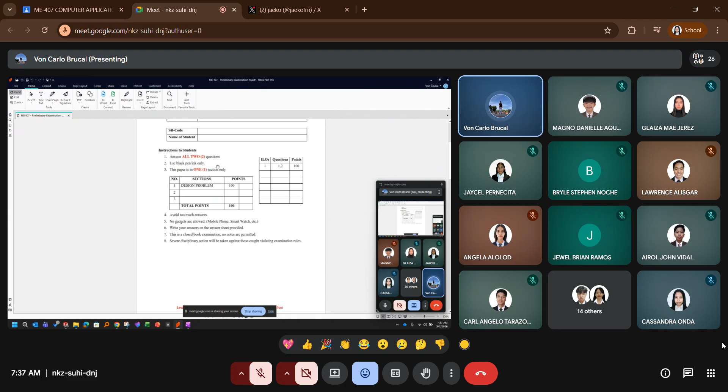There were two items that needed to be modeled, and the final answer will be the mass of the figure. But don't worry, the exam will be different from this, since right now I'm going to share with you how it was done.

Please access your SolidWorks so you could run through it with me. If you have questions, you can ask me already. If you have some recording tools, you may record this session also, so you will be able to understand how it was done in a very practical way.

So is your SolidWorks already open? For those doing SolidWorks now, can I see some thumbs up or reactions? Okay.

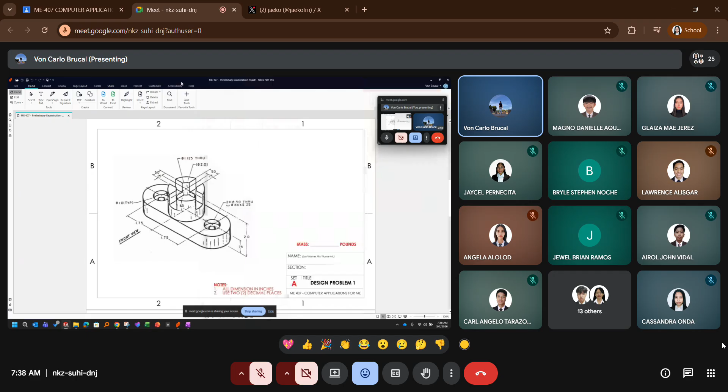So now I'm sharing with you the SolidWorks. This is the 2022 version. Again, I'm not very picky about which version of SolidWorks you use, as long as it's SolidWorks. Let me adjust this so it's not full screen, so we could have it side by side.

So the first thing you need to do on SolidWorks is create a new file. Click new, then it will be on the part environment, which is this one. Then click OK. So this is what you got after you create a new file.

The first thing that you are going to do whenever you see a design plate or design exam is to read the notes. The first note here is that all dimensions are in inches.

So where are you going to adjust this in SolidWorks? You will see it at the lower right bottom. You will just click this one and have it set to IPS. We have four selections: meter-kilogram-second, centimeter-gram-second, millimeter-gram-second, and lastly IPS, which is inch-pound-second.

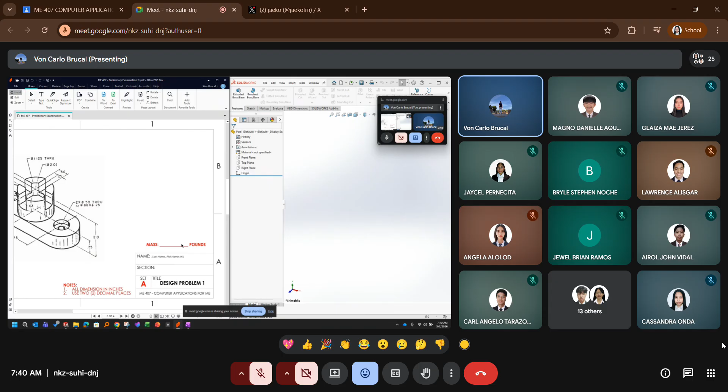Going back to the test paper, you'll see that all dimensions are in inches, using two decimal places, and the mass is in pounds. So you need to make sure your answer is in pounds.

The second thing you're going to do is inspect the model. When we say inspect the model, make sure you are able to visualize it yourself. It says here that this is the front view. So this projection will be the front view, this area is the top view, and this is the right side view.

If I were the one taking this exam, the first thing I'm going to do is plot these dimensions, or analyze what the figures here are. We have a slot, so the lower base is the slot. We have two holes with counterbore, one circular boss, and some slits or cutouts.

Let's do it one by one. I'm going to start on the top view, imagining that my eye is here and I'm looking downward. So, top plane - then you'll see this sketch icon, or select sketch, select the top plane, then click sketch.

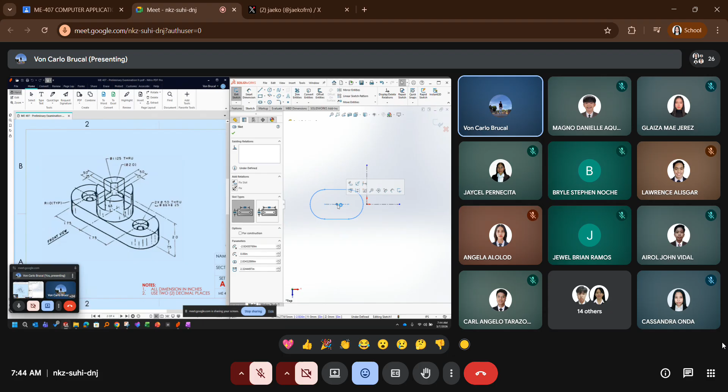Then the next is this one. You need to fix this center line of the slot to your origin, which is this one. So select this point of the slot, while holding the control button, select the origin and have it as coincident. So now you have a slot and it is on the center.

So now what you're just going to define is the size of the slot, how wide it is and how thick it is. So now let's go with dimensioning. So what we have here is that it has a radius of 1.0, or I would say here, since it was in inches and two decimal places, we can have it as 1.0.

Smart dimension, select this one and have the radius as 1. So it's 1 inches, right? And since you are creating a slot, meaning this radius, it should be equal to this one.

Now you will be able to see that the center of this one, this 1.75, is the same as the location or the center of this radius. So click smart dimension. Okay, let me highlight this one.

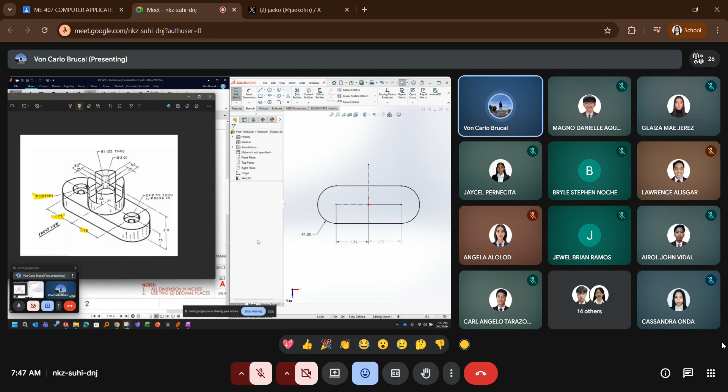All right. So let's mark this 1.75 and this one. And now let's have this thickness. So this thickness is 0.75. So exit sketch. After exiting sketch, click extrude boss or base. Then define it as 0.75. So you're also okay with this 0.75.

Then you should be able to create this hole callout. So it was defined as there's a through hole of 0.5 inches and we have a counter bore of 0.88 inches with the depth of 0.25. I'm not sure whether you are familiar with this kind of dimensioning, but this is a very typical mechanical callout for hole with the counter bore.

So first, let's start with this 0.5. In order for you to do that, select this face, right click and select normal to. After that, select this face, then click sketch. After that, again, the first requirement that I'm asking you to do is create a center line from here to here. Then after that one, create a hole. Create a hole first. After you create a hole, establish the size and the relationship.

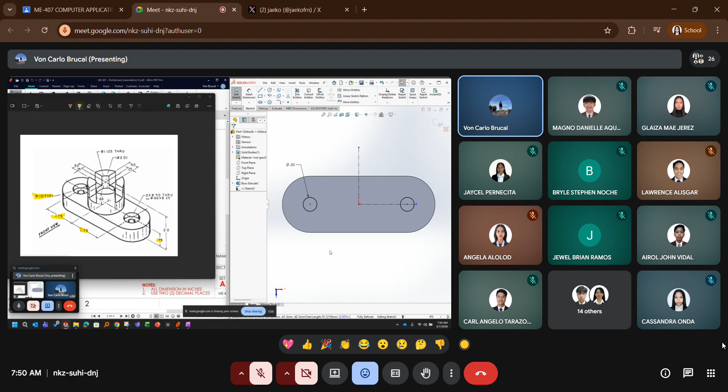Then after that, in order for you to translate here on this other side, click mirror entities, select the circle itself, then mirror about your center line, then click OK. So, and you are going to create your feature through. So exit your sketch, click feature, click extruded cut, then since it's through, just have it here, select through all, then click OK.

So you now have two holes. So let's highlight this one. Okay, let's now do the 0.88 counter bore with a depth of 0.25. So select this portion, click normal to, select this face and click sketch.

Again, the first thing that you need to do is create a center line. So after you create the center line, now create a hole again. This time it's a counter bore, meaning the center of these two holes we created earlier is the same as this counter bore. So just click here.

Have it here and define the size, 0.88. It's already color black, so it's defined already. It shares the same center with this hole. Then click mirror entities, select entities to mirror, which is this one, and mirror about is this one. Then click check or OK.

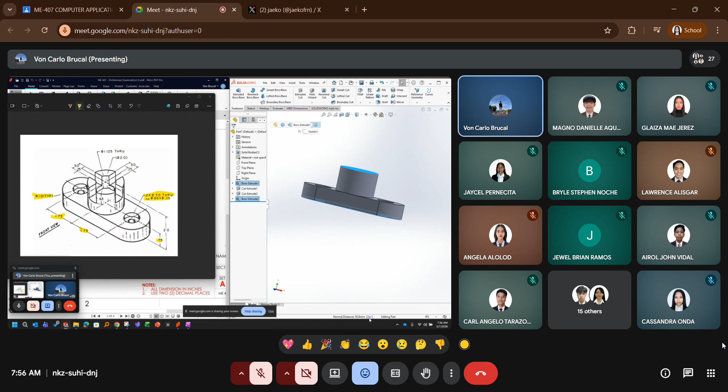Why am I selecting this one? Because you should be able to set the bottom part as this and have the dimension 2 inches. So it is now projecting at the bottom. In order for you to project it on the top, just select this one and click check. To validate that, select this surface, and while holding the control button, select this surface, and you will be able to see 2 inches here. It's 2 inches at the bottom. Okay, so we are now okay with this dimension.

The next is, there is a hole which is 1.125. Let's make another hole. Select this face. Why this face? Because this is the source of the hole going down. Select this face, right click, select normal to. Then after that, select this one, then sketch. Create your center lines.

Then select circle here and let's have a dimension of 1.125. Then it is already color black, so it is already defined, fully defined. Exit the sketch. Then click feature, extrude cut, and it should be through all. Now we are okay on this dimension.

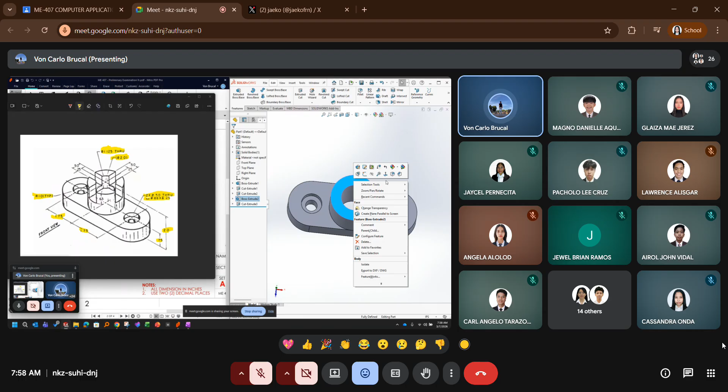Okay, now let's create this slot here, which is 0.5 inches. So right click, select this one, then right click, select normal to, then select this one, create, click sketch, then have it as center line like this. Then you are going to cut this kind of portion. So let's have a rectangle here, let's just create first a rectangle.

Then since it is related on the center, select this one while holding the control button, select your reference line, select this other line, so you have 3 lines, then have symmetry. Then same with this one, select this line, your center line, and this line, and have it as symmetric. Then define the dimension, the dimension is 0.5. So smart dimension from here to here, it's 0.5.

Now you don't know the length, right? You don't know the length of this rectangle that we created. So, and your intention is just really to cut. So just select this line and select this projection line here and have it as collinear. So now you have this line. At the same time, we're going to create this portion, which is also 0.5.

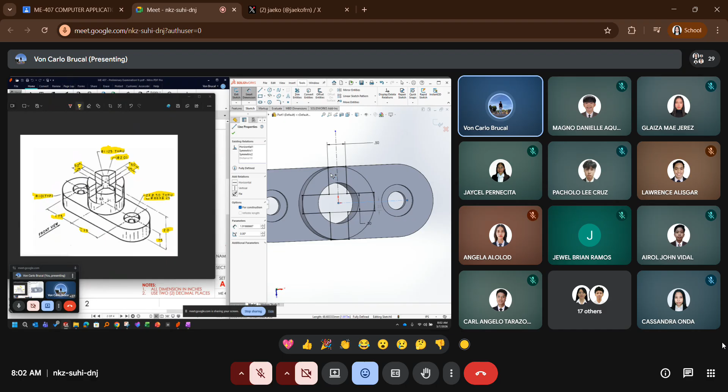Now we will be able to define this portion and this one. The 0.25 was defined as symmetric, meaning from this portion up to here it is 0.25 — it's a driven dimension. So that's the 0.25 here. Then exit sketch, and now extrude cut again, extrude cut, have it blind at 0.63.

Now you're also done with this. So that's it — you now have this one up to here.

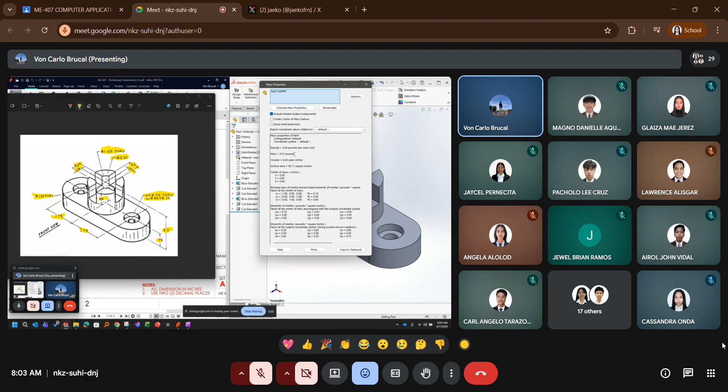In order to validate your answer, click evaluate, then have it as mass properties. You should be able to get 0.31 pounds. That's the answer you should write whenever you are answering this — it should be 0.31 pounds.

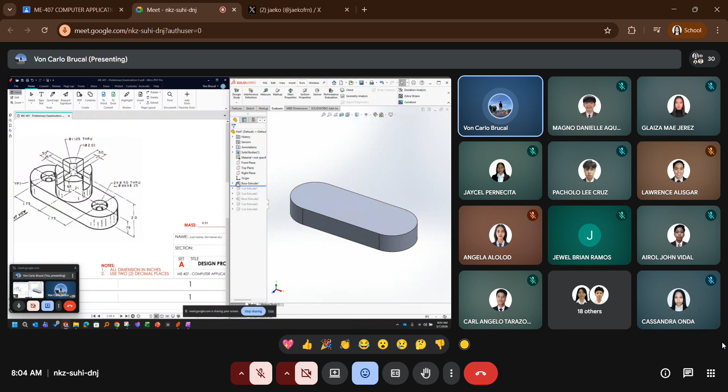Una natin ginawa, kumuha tayo ng boss extrude, which is the basis, the sketch here to get the 0.75. Then after that we create two holes, the 0.55 and 0.5. Then we create a counterbore, the 0.88 with depth of 0.25. After that we create this feature, then we cut the hole in the middle, and lastly we created this feature which is here.

Let's say you want to apply any colors on this one. Just right click this one and have appearance. Let's say you want to make it blue, cyan blue, or green. Gusto nyo lagyan ng kulay, pwede, kung alin yung mas convenient sa inyo.

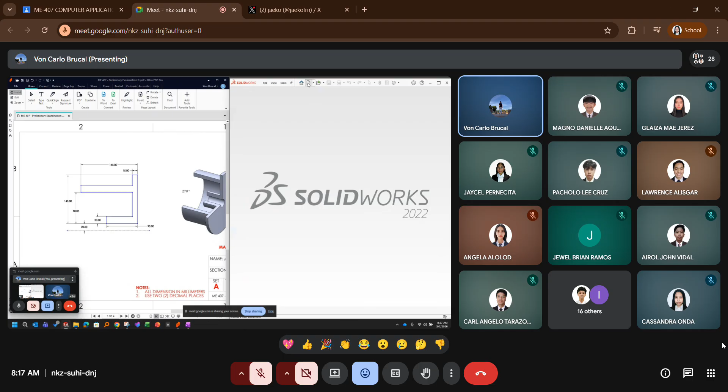Okay, so for the next item, here, let me close this one. So let's create a new model — this is number 2, item number 2 on the exam. The first thing you're going to look at here is to analyze it. And the first thing you have here is all the dimensions are in millimeter. So now it's on millimeter, so it's fine.

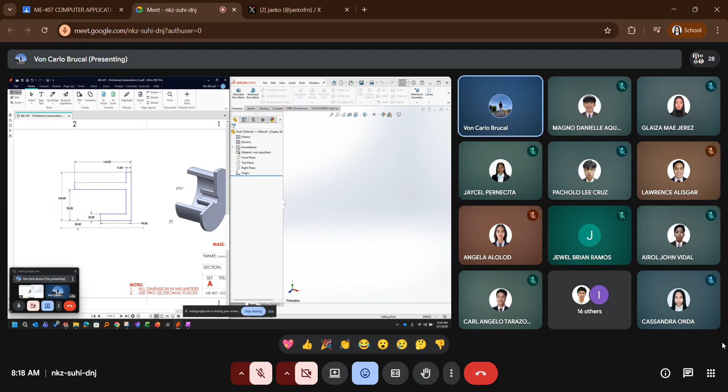If you're going to analyze it, this is the front view where it is being cut here, and this is the profile. So let's now create a model based on the front view. Select the front view and click sketch. The first thing we're going to do is create reference lines from here to here, and from here to here. Then, in order to somewhat mimic this profile...

Let's create this line up to here, then here to here, and going up, this, this, here, here. Then after that let's have it dimension. Select smart dimensions from here to here — it is 20 millimeter. From here to here, it's also 20.

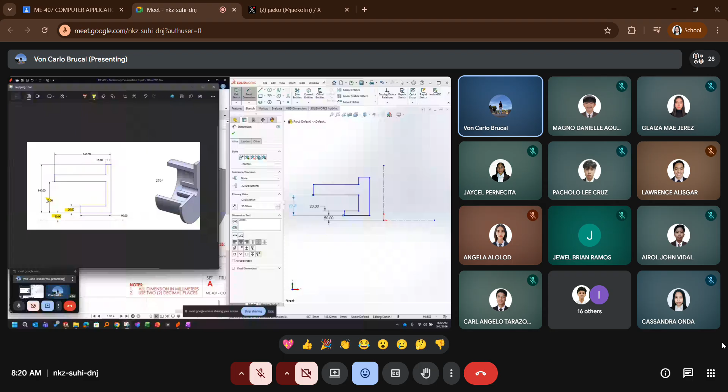It's now 20, 20. Then from this portion up to here was defined as 90. Then from here up to here is defined as 140.

Let's define the length. So from here to here, it's 15. From here to here, it's 140 millimeters.

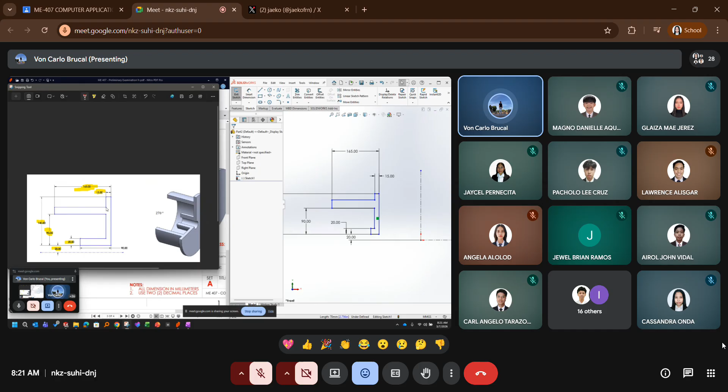For this one, it was assumed that this is collinear. So in order for you to have that, just select this one. While holding the control button, select this, then have it as collinear. So that's that, and we have the 90 dimension here.

So smart dimension from here to here, it is 90. Here, so it's still not defined. So just make this line and this line on your reference line collinear. Select this line while holding the control key, select this one, then have it collinear.

There you go. So there is still one point that is not defined here, which is the dimension from this point up to this point. So what we're going to do is just assume that it is also 20. Select smart dimension from here to here and have it as 20.

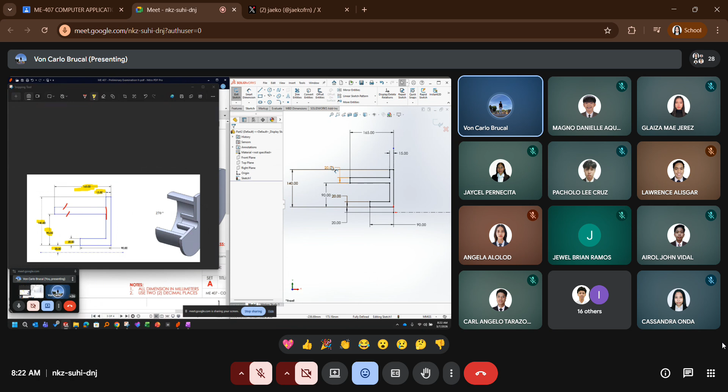And now, after that, we're going to use the revolve feature. What he did here is, after making this profile, he needs to rotate it like this. So in order to do that, exit sketch, select features, revolve base, then select axis of revolution.

So this is what we select, then have it as 270 degrees. It's on the back, so to move it to the other side, just click this, then click check or okay. So now you have the same model as what we have here, 270 degrees.

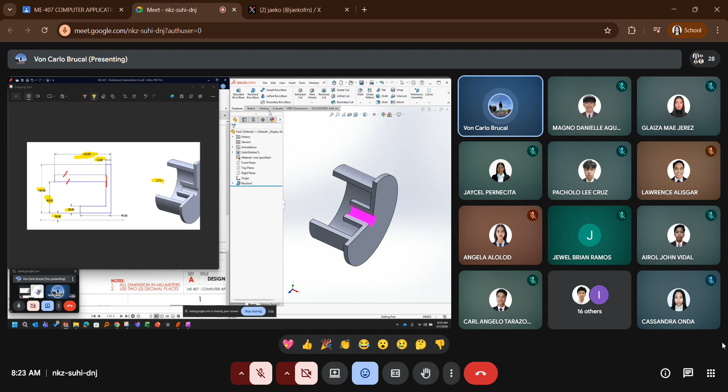So that's it, you're done. You'll also get 50 points if you're able to get the mass of 2,799.16 grams.

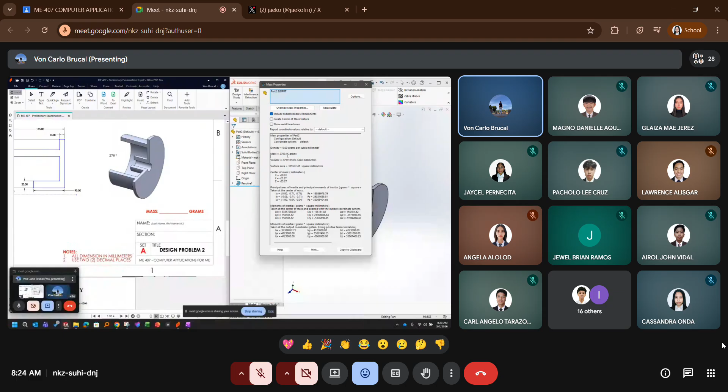So that's how our exam goes. You just need to model it, then click evaluate, then mass properties. You'll have something like this.

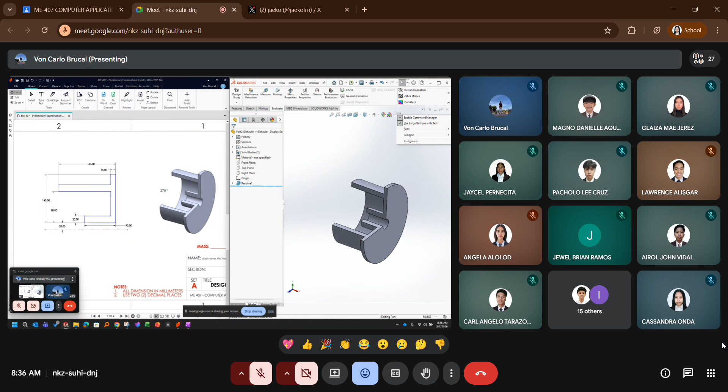Alright, so let's proceed with additional features we're going to do in SolidWorks, especially on part modeling. Let me open one example of a part that we make in our company. The one thing I'm going to discuss is about configuration.

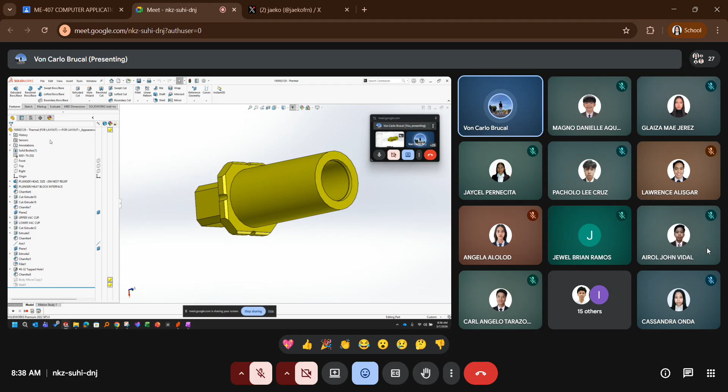When we talk about SolidWorks configuration, we are trying to give some stages or definition of a part depending on how it will be used. For instance, in this case, we made two configurations. One has this feature, the body and shell, and if we go to another configuration, it changes color because it doesn't have the body and shell.

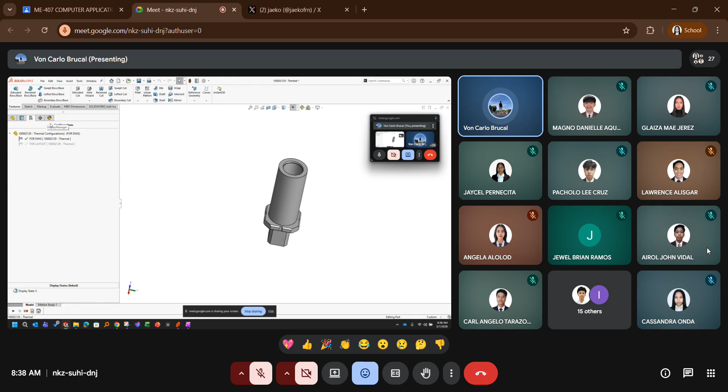So how do you make a new configuration? It's easy, just right click and add configuration. Let's say we will have additional features added to this part, with access holes.

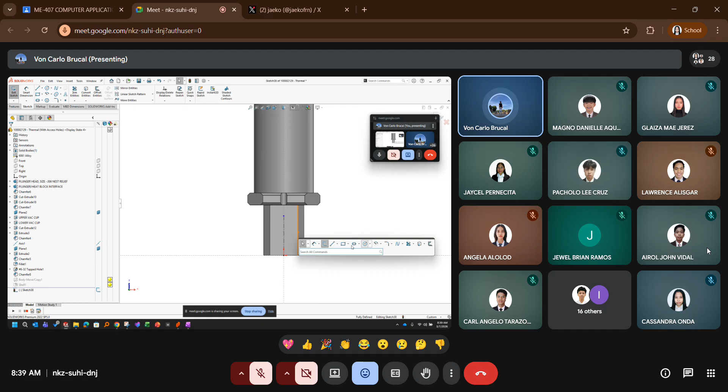After making the configuration, if you want to make a hole, select this portion, select sketch, have the center line here, select create circle, and define the size 0.09, and we have it located from this surface at 0.1 inches. Exit sketch, then extruded cut, go on.

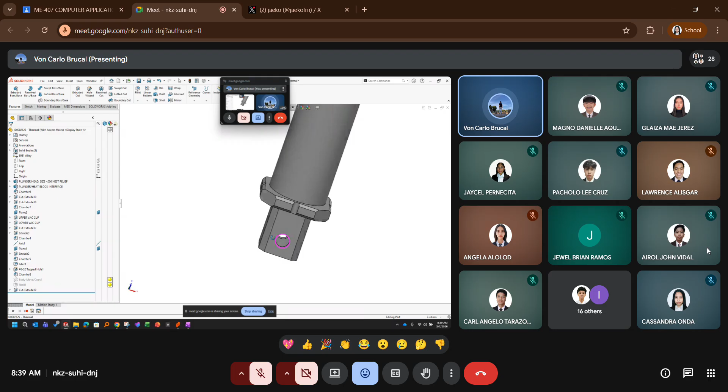I'm calling these two holes an access hole. So if I go back to other configurations, let's say for drawing, I can suppress it. With access hole, there's a hole. In the drawing version, there's none. So with configurations, you can hide features - with access hole, without access hole, or for the drawing.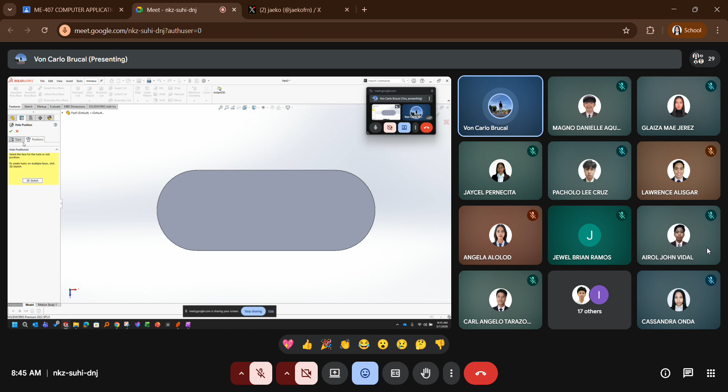Then we have a counter bore diameter of 0.88 and 0.25. Then have it as position. Click mo lang to kung saan ka magbubutas. Then yan, halimbawa dyan, click OK. So ito din yun, meron kang 0.88 at meron kang 0.5. Yan, so yan lang din yung ginawa natin kanina pero hole lang yung nakalagay dito.

So lalabas yan, then Sir, paano kung halimbawa gusto ko dalawa yung butas? So edit mo lang tong sketch. Edit sketch, gawa ka na lang muna uli ng center line dito, both sides.

Then select this point, itong point na to, ito yung location ng iyong counter bore. So pag sinelect mo yan up to here, let's have it coincident. Then define the distance between here to here of 1.75.

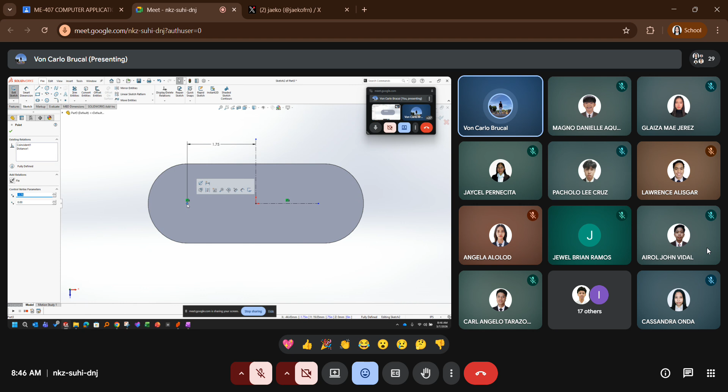Tapos, pag gumamit ka ng hole wizard, every point corresponds to one counter bore. So, mag-mirror ka na lang. Select mo itong tuldok, mirror about dito. Then check. Then after nyan, mag-exit sketch ka lang. Ayan na, may counter bore ka na.

So, itong 2 times 0.5, tapos may counter bore na 0.88, nagawa mo lang siya ng isang feature. Unlike kanina, nagbutas muna tayo ng 0.5, tapos nag-counter bore tayo nito, pinagsama na natin dito sa hole wizard. So, isa yan sa mga shortcut na nagagamit lalo na sa industry. Talagang gamit na gamit yung hole wizard kasi ito ay naka-standard naman itong mga size na to.

Yan. O yung kanina sa exam, kung gumamit kayo, nag-effort kayo mag-model at nagdalawa kayo ng feature, pwede nyo na siyang pagsamahin. Yan. Ano, yan din yun, 0.5, yan.

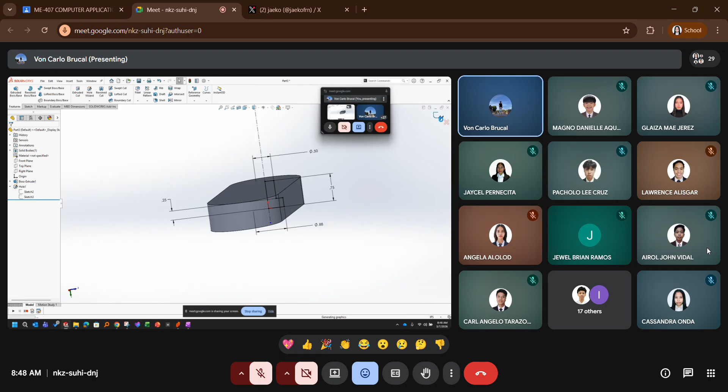Okay. Then, yan yung mga nagagamit natin kalimitan. So, itong mga revolve cut, hindi naman natin yan gagamitin. Hindi ko na para ituro yan. So, ang tinuro ko lang ay more on configuration at saka itong hole wizard.

Alright. So, pinakita ko rin sa inyo kung paano maglagay ng kulay. Right-click nyo lang dito and have appearance. Or kung gusto nyo, click nyo lang to and pwede nyo i-select yan. Yan yung palitan agad ng kulay, yan ang green. Halimbawa, itong counter bore, itong hole, gusto nyo palitan ng kulay, gawin yung dilaw. Pwede. Ayan.

So, if you want to be artistic on colors, you may do so as long as you will be able to understand kung ano yung mga pinaglagay mo.

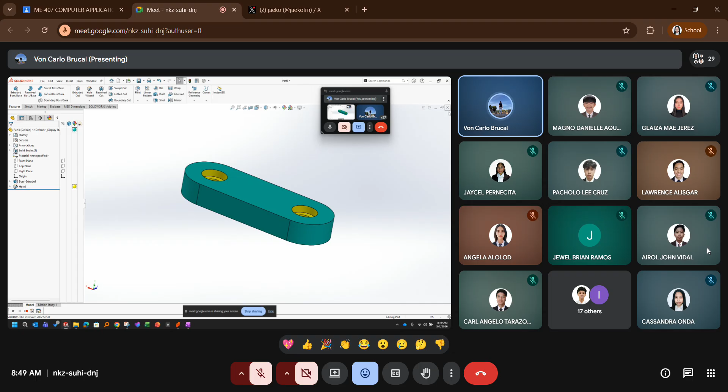Okay. So, now punta na tayo sa assembly. So, ito na yung magko-cover ng midterm natin. Assembly naman na. So, ang assembly, from the name itself, you will be able to combine majority of the parts. Hindi na kayo magmo-model dito. Assuming na maalam na kayo mag-model, maalam na kayo mag-3D, so ngayon mag-assemble naman tayo. So, ang requirement ng sa assembly, kailangan may mga parts na kayong nagawa.

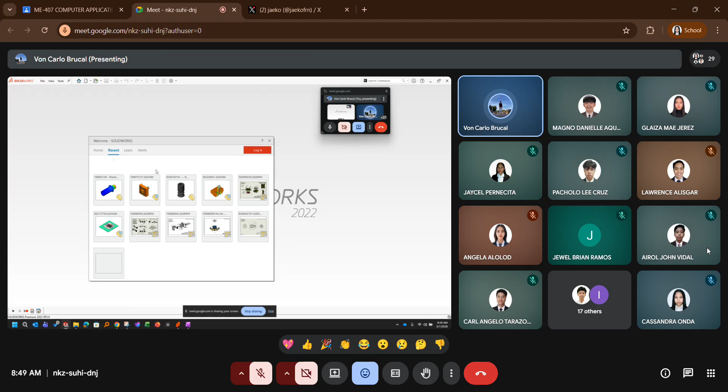So, let me open one example of assembly. Let's say this one. So, yan, meron tayong mga application. Yan, wag pala to. Medyo broken yung mates, ano ba yung mas madadali?

Ito na lang. Ito na lang. So,

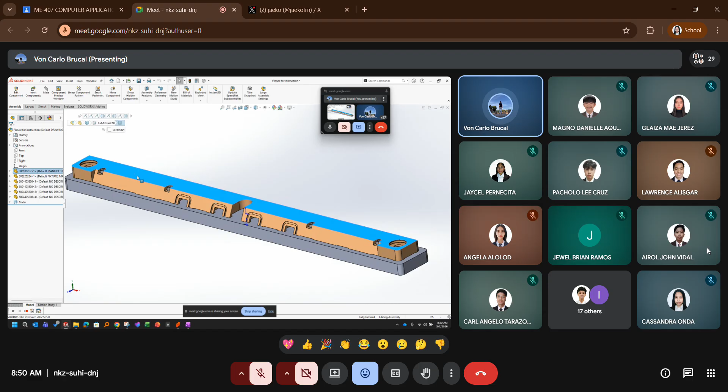Dito sa isang example na to, ito ay ginawa namin sa factory para gumawa ng fixture. So when we talk about fixture, ito lang naman yung nasa ilalim and this is the actual part. So, ano ba yung mga inassemble ko dito? Meron akong ginawang manifold, which is the orange one, and we have the fixture, which is this one, the gray one, and meron tayong set ng screw, 4 na screw. Yan. So, kung ikaw ay mechanical designer, ang ginagawa mo muna, i-model mo muna itong mga parts na to. So, ito, na-model natin to.

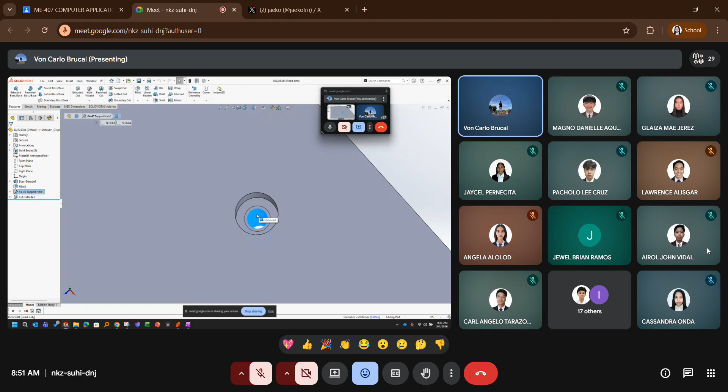So, madali lang naman siyang block. So, siya ay merong base, meron siyang fillet dito, meron siyang tap hole or yung thread, yung pagsusuutan ng tornilyo. So, you might ask, sir, bakit hindi naka-model yung thread? Pag nasa factory na kayo or pag nagde-design na kayo, hindi na natin minomodel ang thread kasi pampabagal lang siya. Katakaw kumain ng memory yung mga thread. Yan. Just to be able to represent it more, so yan yung may broken line siya.

And we have a cut extrude here, which is itong counter bore. Ayan.

So, try natin uling gumawa ng assembly. Magbubuksan ko to lahat. Ayan. So, magagawa tayo ng bagong assembly, no? So, we have 3 parts.

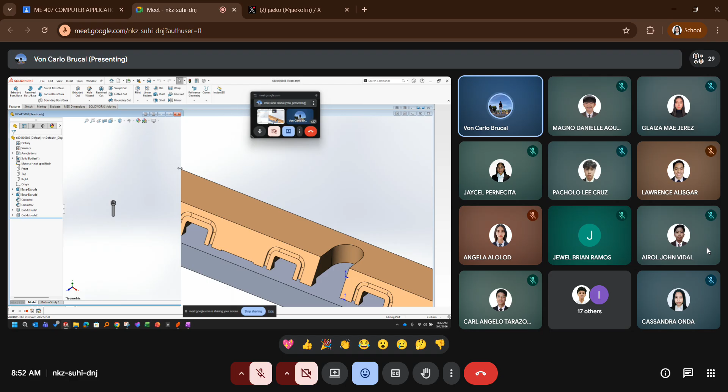Ayan. Pwede nyo gantuhin yung SolidWorks nyo, ha? So, let's say, mabilis-bilis naman yung SolidWorks nyo. Pwede nyo gawing ganyan, na-optimize naman siya na ganito.

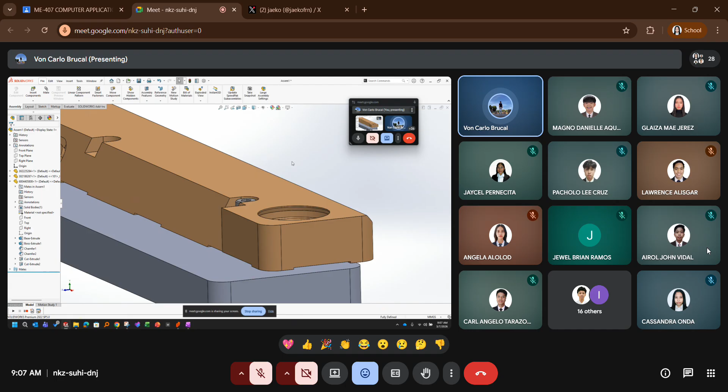So, ganyan tayo pag nag-assemble, no? Meaning, iniintindi natin kung ano yung mga screw na papasukan, saan papasok yung screw, ano yung tamang relationship niya, dapat nasa gitna, etc. So, hindi lang tayo basta makapag-mate ha, baka mamaya yung mga models natin,

sablay-sablay. So, dito sa mga ganitong scenario, let's say, nasa company ka, diba, nag-OJT ka, pinagawa ka ng fixture. So, ganito yung mga typical na scenario ng fixture. Isang bloke lang siya, tapos may lagayan lang ng screw. Yan. So, i-check nyo muna ulit.

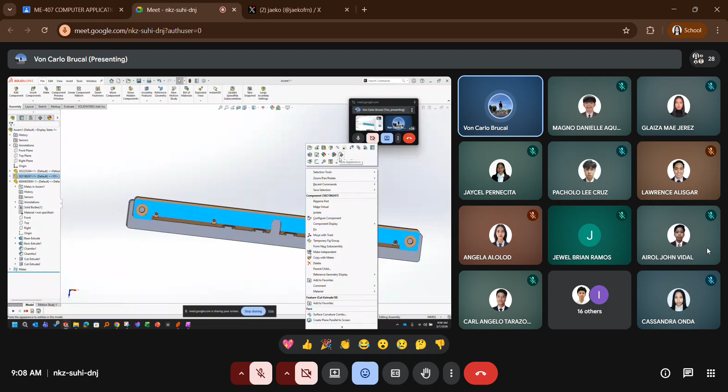Right-click nyo to, normal to, then i-zoom nyo dito. Oh. Same center ba itong thread na to, tsaka ito? Same. Hindi siya duling. Same siya, hindi din. Same pala. So, ito, hindi din duling.

Kasi may mga screw tayo minsan na nandito yung butas. Duling siya. So, pag siya i-inassemble nyo, minsan, pangit yung pagkaka-screw nyo kasi duling. So, pag ikaw ay nagdi-design, syempre, hindi mo iduduling yan.

Dapat tama yan. Sir, paano kung ang gagawin ko, gusto ko maglagay din ng screw dito? Maraming way. So, una sa lahat, pwede ka uli mag-insert components, no? Then, select mo yan. Pero may shortcut yon.

So, select nyo lang to. Pagka-select nyo yan, i-hold nyo yung control. Pagka-hold nyo ng control, i-drag nyo. Yan, lalabas na rin yan siya dito. So, hindi mo na kailangan mag-insert component.

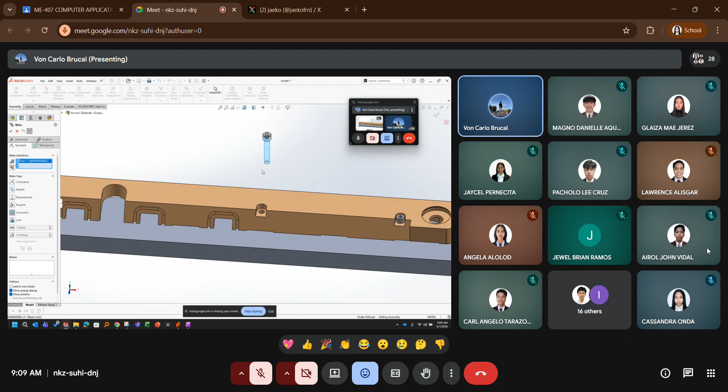Mate nyo lang uli. Mate. Concentric. Ayan. Ayan. Okay. And from dito. Dito. Ayan. Then lastly, yung front niya. Itong front na to, pinselect ko, mate. Automatic siya mag-parallel. Ayan. Wala na uling negative sign.

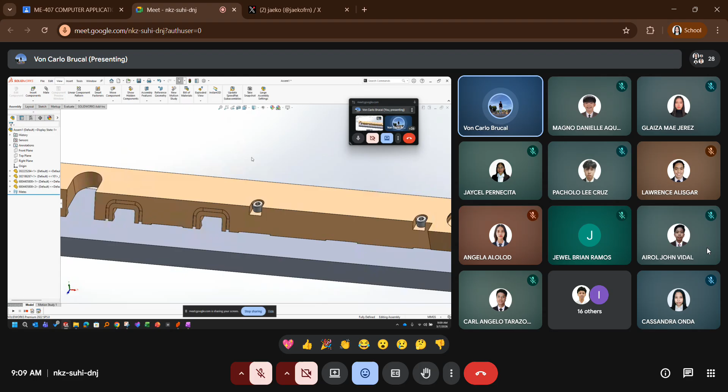Meron ka na nito. May shortcut pa uli dyan kung halimbawa maglalagay kayo ng mga screw. So, ang gawin nyo lang, right-click nyo to, copy with mates. So, yan, lalabas na yan.

Then, select nyo tong point na to. So, saan siya concentric? Dito. Saan siya papatong? Dito. Saan siya parallel? Select nyo lang to, front plane. Then, check. Ayun na siya, oh.

So, ulitin nyo lang dito sa butas na to. Ayan. Then, dito siya papatong. And sa front plane siya nakalagay. Then, check. Ayun. Meron na kayong simple na assembly. Ganyan.

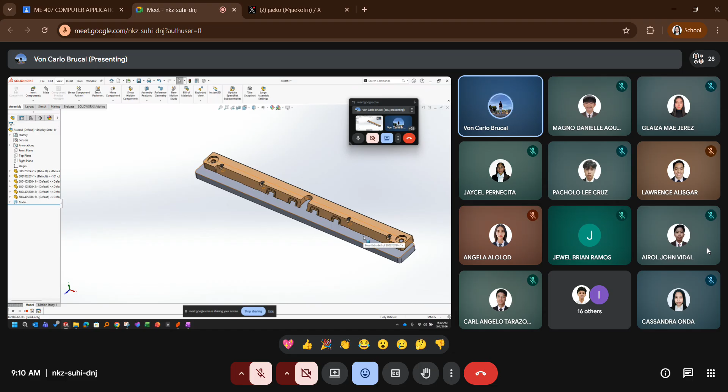So, yan. Nakagawa ka na ng assembly. Paano kung halimbawa you are a design engineer then meron kang technician or assembler? Siyempre, tuturuan mo siya kung paano mag-assemble, di ba? Turuan mo siya kung paano mag-assemble.

So, dito ngayon papasok, kung pupunta ka dito sa configuration, dito ngayon papasok yung tinatawag na exploded view. So, sa exploded view, right-click natin to, then exploded view, then magse-select ka ngayon ng mga pyesa.

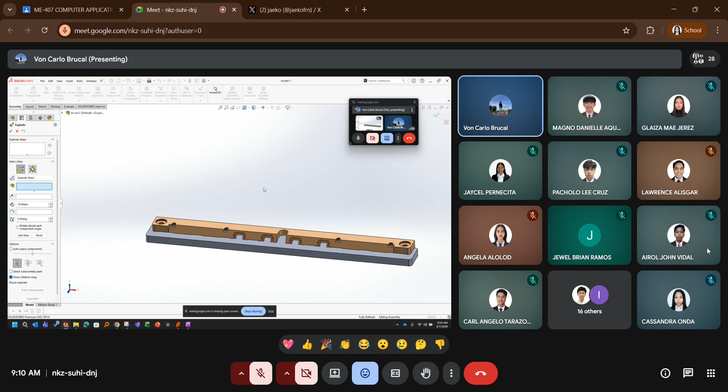So, pero dito, pabaliktad. No? So, syempre, ito muna yung isa-select mo. Select mo yung mga screw mo. Ganyan. After that, pwede mo silang iangat na ganyan. Then, click, check. Okay. Right-click nyo uli.

So, after nyan, hindi pala dapat i-check. Dapat ay add step lang pala. Sorry. Select nyo rin to. Then, ipitin nyo sa taas na ganyan. So, pabaliktad yan. Meaning, kaya siya pabaliktad, tataas mo muna yung screw bago yan.

So, yan yung exploded view na tinatawag. Na pag dinouble click mo siya dito, pag in-off mo yung exploded view, naka-assemble siya. Then, kung gusto mong pakita ulit, double click mo, yan siya.

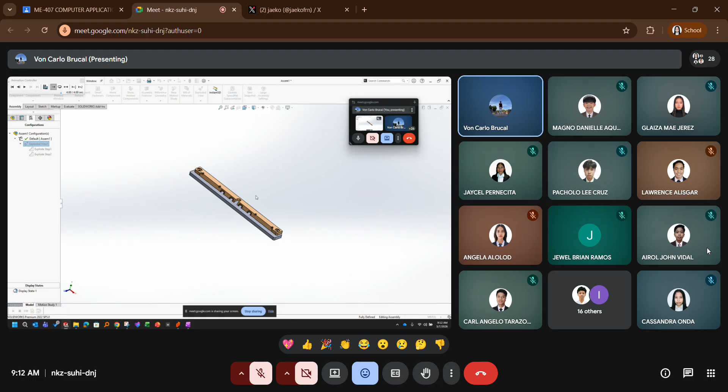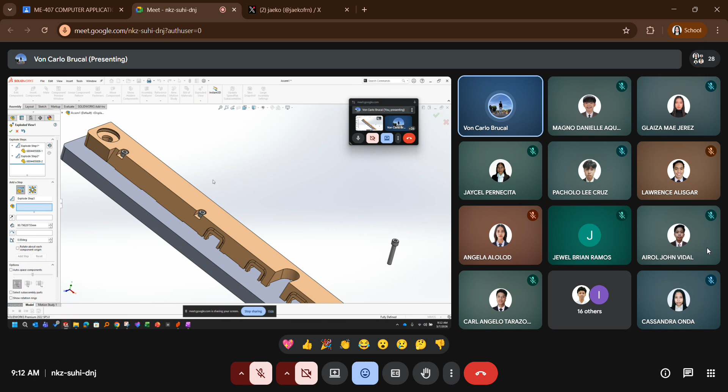so pag inanimate mo yan, isa-isa ngayon yan. Ganyan. So, ito lang ulit. Yun. Yun. Ganyan yun. So, sa pag-assemble. So, pwede mo siyang i-play yan.

So, kung gusto mo i-reciprocate yung ano niya, yan, pagbabaklasin naman, ganyan. So, kung ibabalik nyo, ganito naman. So, ito, simple assembly lang to.

Pwede mo tong gawin, halimbawa, pinagde-design ka ng mga makina, kung paano mo i-assemble yung cylinder heads, pwede mo siyang gawin. Pero ang mahalaga, dapat may model ka. Kaya kanina, ina-emphasize ko sa inyo na dapat maalaman lang kayo mag-model. Hindi kayo makakapag-assembly kung hindi kayo maalam gumawa ng 3D.

So, yan. So, hindi pa yan motion analysis, ha? Assembly pa lang yan. Oh. So, ganyan yung pag-mate natin para makagawa kayo ng assembly.